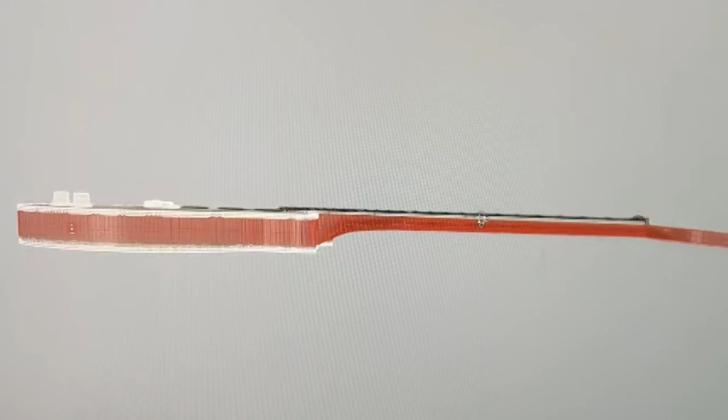Here's a little project I've been thinking about doing for a while: building, as near as I can without spending a crazy amount of money, a replica of the Red Special guitar, which was built by Brian May of Queen back when he was a young fella. So I'm hoping that I can produce something that can come close to his guitar design.

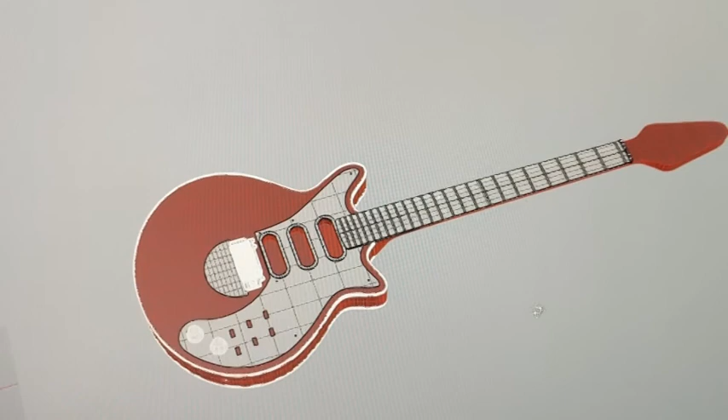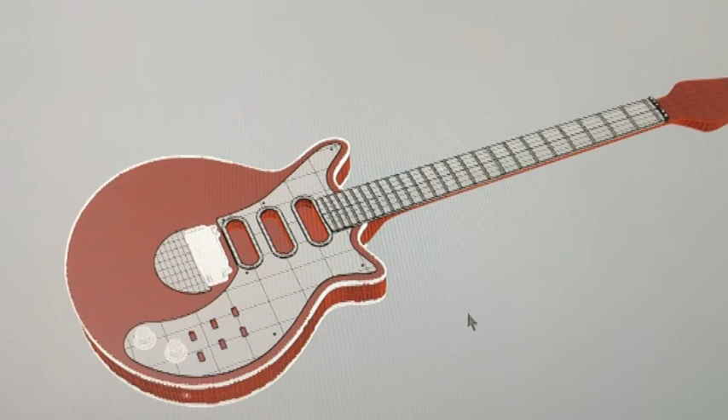I've been searching the net for a while, and I found quite a few people have plans for it. Obviously, to buy the proper plans you need to purchase them. I've just used pictures that people have uploaded to come up with the design, and then some of the specs from the Brian May guitar website for the radius of the neck. I know it's 610mm from the bridge to the nut, and the length of the guitar, plus a few other specs he's got on there. There was also a chap who did a restoration from Sydney of the original guitar, and he's put some fairly detailed specs and pictures of the internals of the guitar. So I'm trying to replicate that as much as possible.

Without spending a super amount of money. So looking at the guitar here, that's my drawing so far. So we'll just start to remove some things.

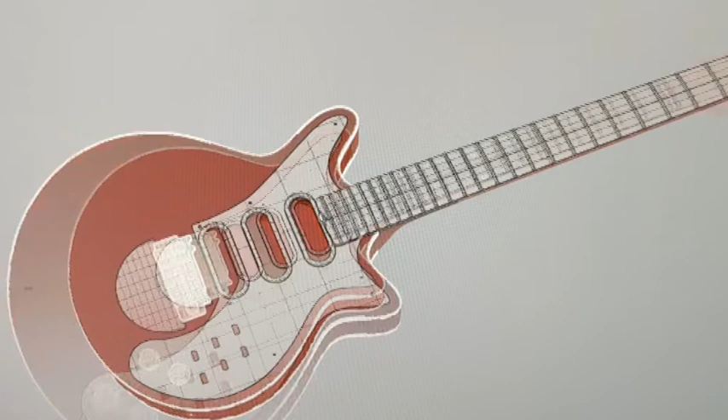So these, I've called these pickup outers. I think they're all made of plastic, but I'm going to probably mill them out of wood and just paint them all up nice and shiny. So we'll just switch them off. So that leaves that.

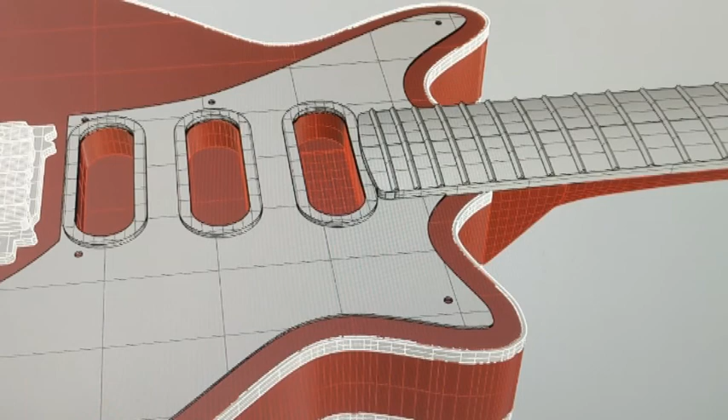And we've got the pick guard here. If I switch that off, it shows the knobs. I've purchased from eBay a couple of Fender chrome or silver knobs here. We'll just use those ones for the time being. You can purchase replicas of what was used on the Red Special, but again they're super expensive, so I'll just use some chrome ones. So we'll switch those ones off.

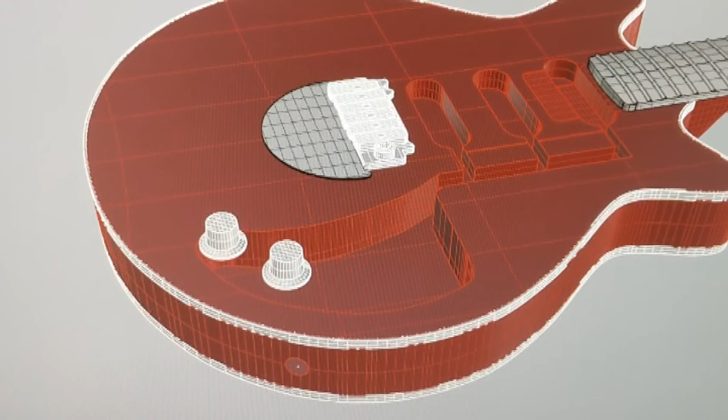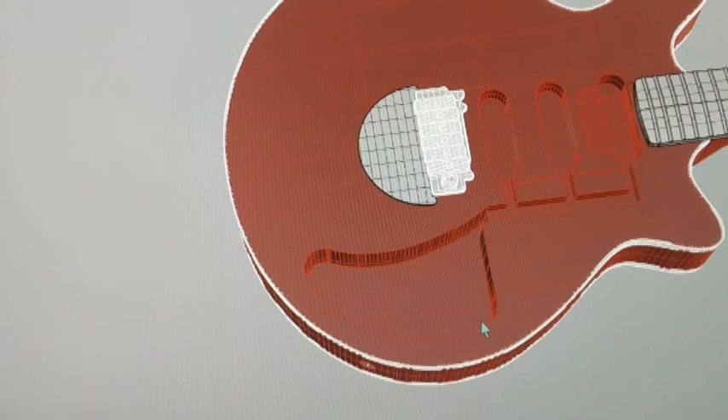The cavity in here, I've just sort of guesstimated at the minute. I know the original guitar had a cavity right along here, and all this was clear, and he had some posts here to do his wiring, so I may copy something like that, I'm not sure yet. If I take out extra wood here, it'll obviously reduce the weight of the body of the guitar, which may be worthwhile doing. But yeah, so I've just put a cavity in there for that.

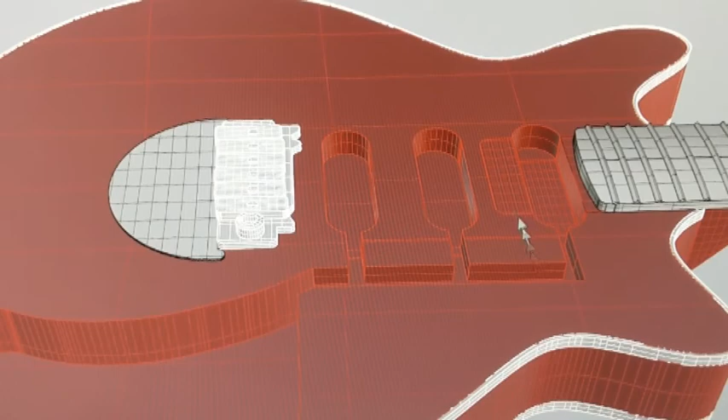Pickup holes are too deep, I know that, so we'll lift those up. The Trisonic pickups that are on the original guitar, I think you can buy them for about £200 or something or other. You can buy knockoffs from China, but I don't know what they're like, and they're probably not wired right, and probably got the wrong gauge wire, and probably got the wrong magnets. They look right, but they're probably all wrong, so I'm not sure.

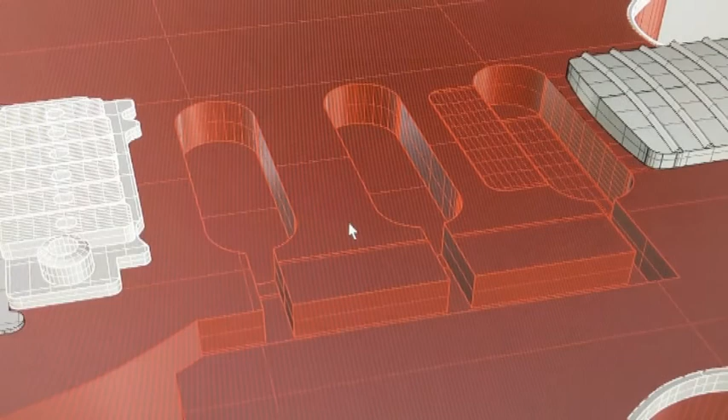You can buy parts from the UK for the magnets, for the original pickups. I've done a bit of research into winding pickups, but I've never done one. In fact, I haven't built a guitar in years. I built a good bass guitar about 35 years ago, I think. So this will be my second guitar. So what a better guitar to start with, huh?

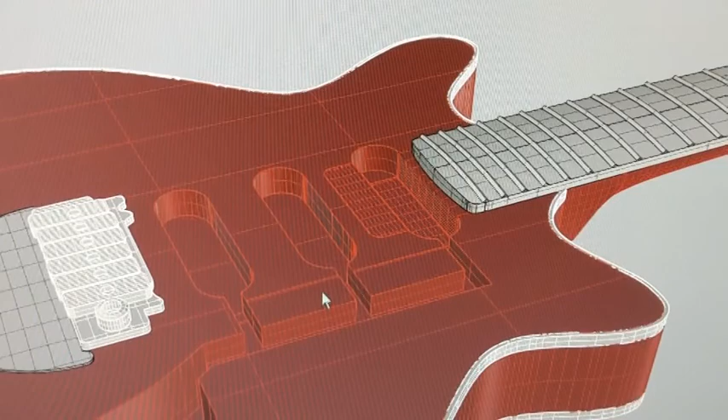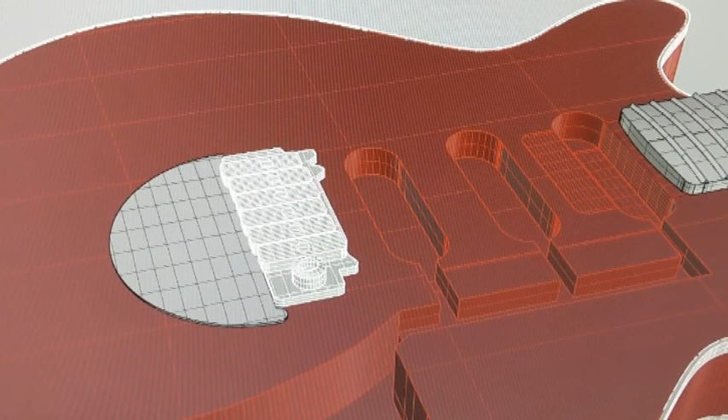Such a pretty looking guitar, this one. Now the bridge I'm using is a Wilkinson Bridge. As I said, you can't buy the one that's on the Red Special unless you're willing to spend a lot of money for a reproduction of what Brian May made all those years ago. So a Wilkinson Bridge. We'll just switch off this back plate here, the bridge backing plate I've called it, and obviously there's nothing there. If I switch off the Wilkinson Bridge...

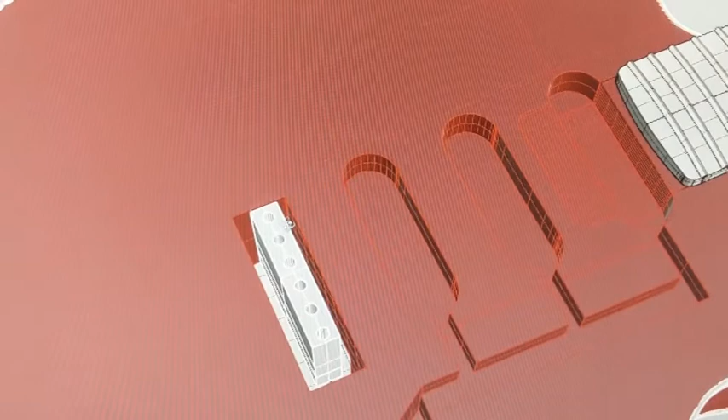This block is attached to the bottom of the Wilkinson Bridge. I've just guesstimated the holes there, they're probably a lot smaller than that, and I'm presuming there's a couple of bolts holding this block in place. Now, this entire block is 40mm deep. The entire Brian May guitar is 40mm deep.

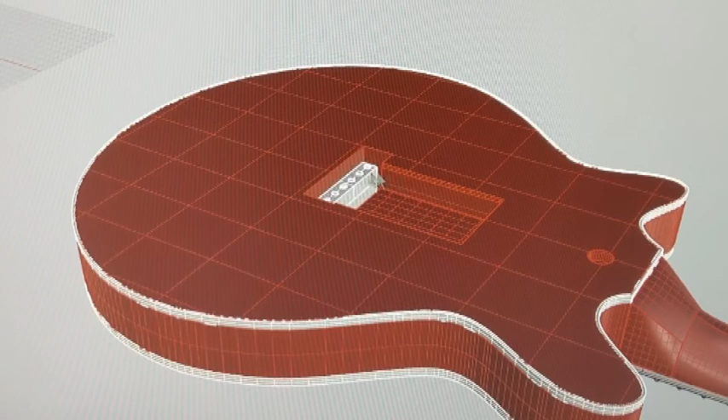So I've had to make this one about 43 just to provide that extra space at the bottom here for the back cover plate, I've called it, so there's enough room. Usually there's springs that run down here, 3 or 4 springs to keep the tension on this, which is attached to the Wilkinson Bridge, which of course keeps tension on the strings. And there's a whammy bar that comes out of here.

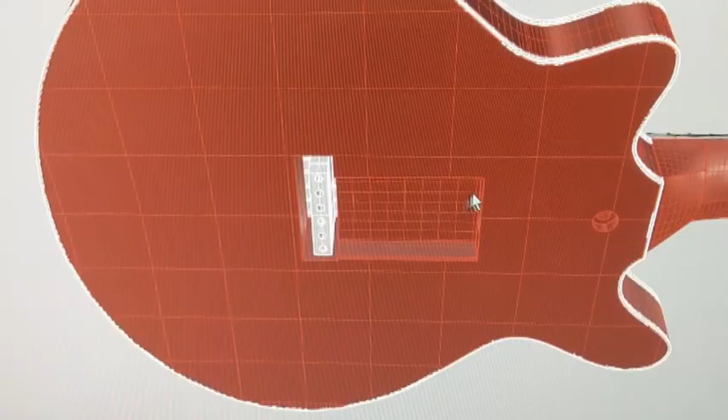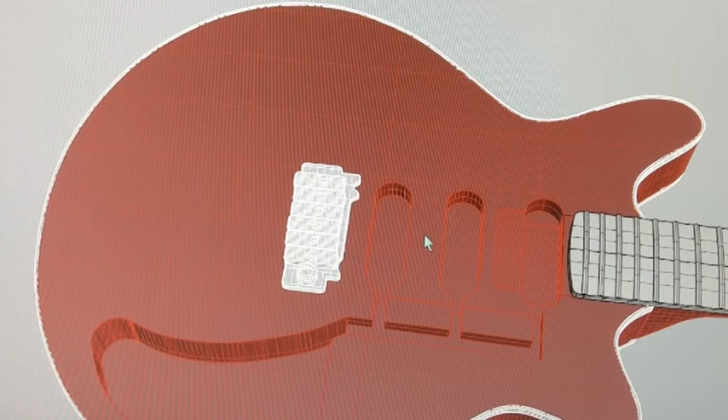Now if I go with that, I've got to have quite a large cavity under here for the springs, which means that I can't bring the neck down any further than this. So this is the neck—it slots into the guitar. On the Red Special, there's a bolt underneath the fretboard that comes out through here, and a nut holds it in place, with a couple of screws here. But if I do that, I've only got about 5mm of wood for those screws to screw into, which isn't sufficient, so I won't do that.

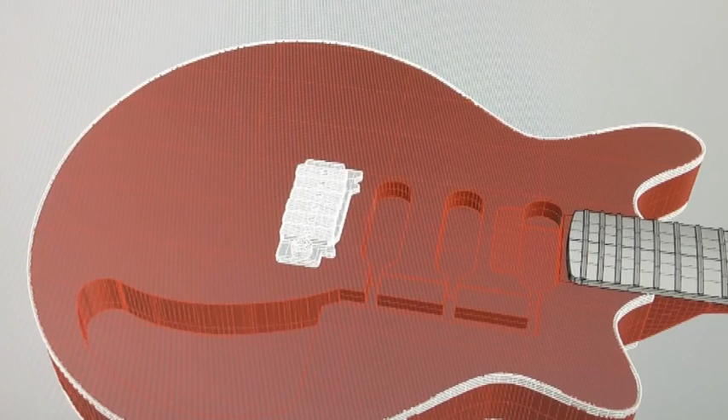So we'll just switch off the binding, which I'm going to put on it. That way I should be able to mill all this nice and easily, then glue on the binding. We'll switch off the bridge—bridge is off—and switch off the block. So it's a hole straight through there.

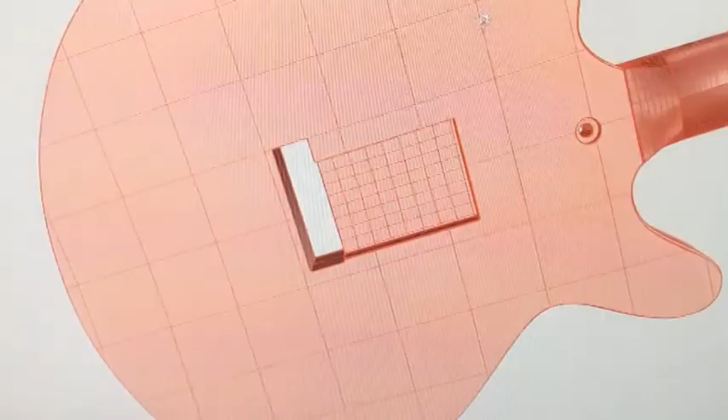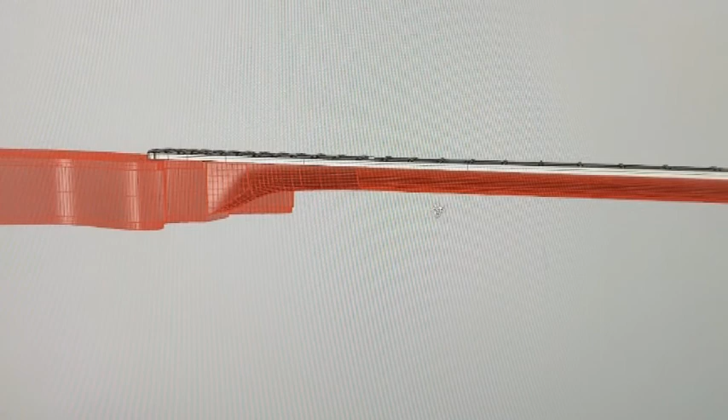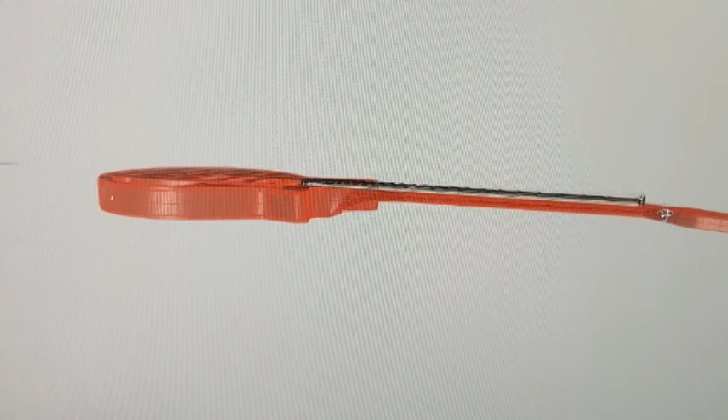If we look at the neck of the guitar, Brian May's neck is pretty thick. I'm not sure if I want to go that thick—I've made a thinner neck here. I might go true to the design and redraw it. I've got a 4-degree angle on the head, and a 9.5, or maybe 9.4, radius all the way along the board.

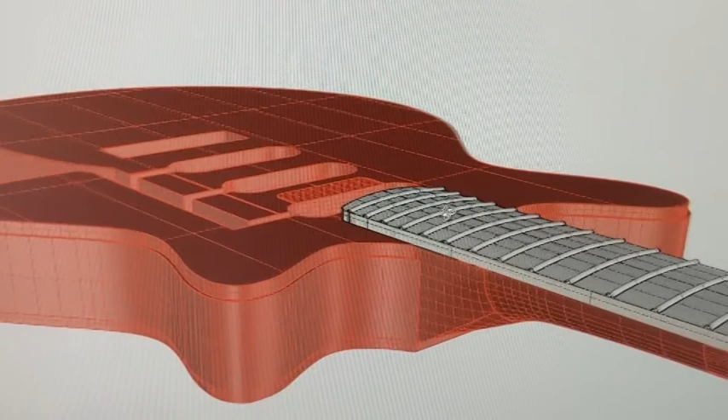So I'll mill my own fretboard and put my own frets in. I've looked at a few videos of that, and I should be able to do it okay. I've got a plasma cutter, so I might make a couple of tools to press these in place using my drill press with a correct piece of metal over them, with a groove ground in it. I can make a press, I'm fairly certain of that. I'll switch off the fretboard and the nut.

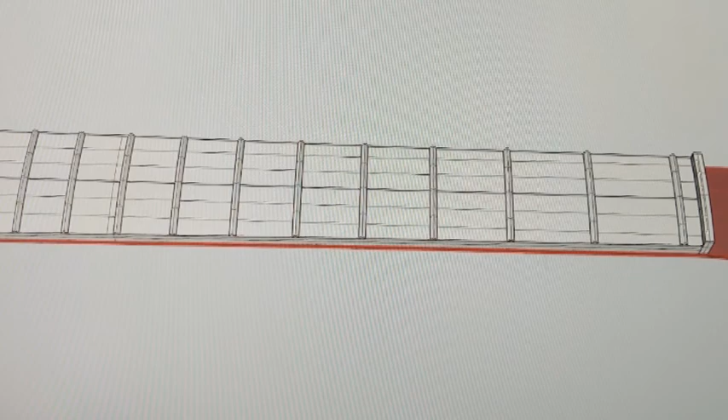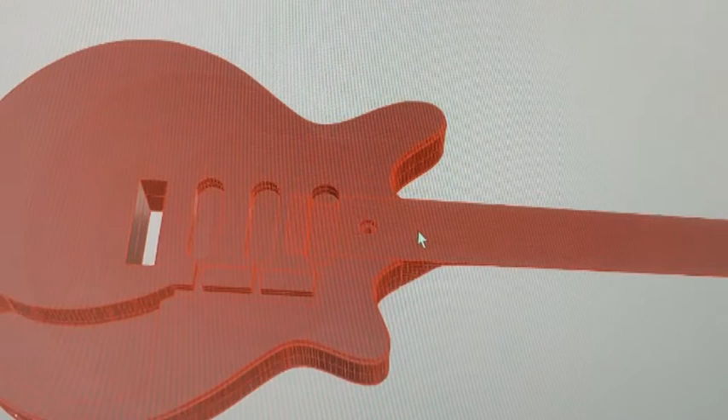Frets on the fretboard—they're gone. I'll switch off the fretboard and the nut, so that's what it'll look like without the fretboard on it. I've ordered a 440mm long truss rod to fit down in here. I'll switch off the body of the guitar now—so that's what that looks like so far.

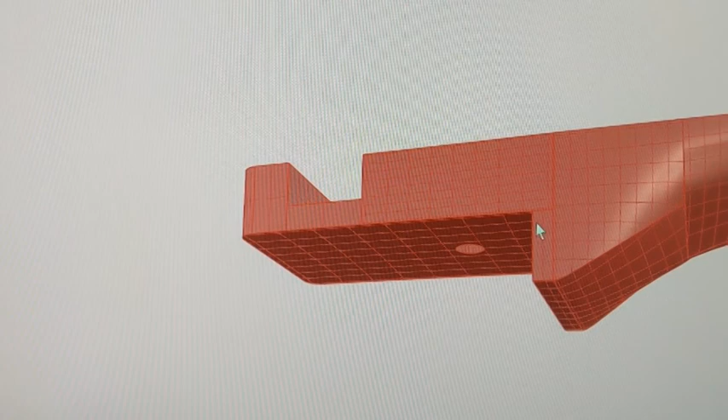There'll be a bolt sticking out here, which will be permanently stuck in place with the fretboard on top of it. This part slots inside the body of the guitar. If I switch it on, you can see it slots inside it—it's the same as what is on the Red Special.

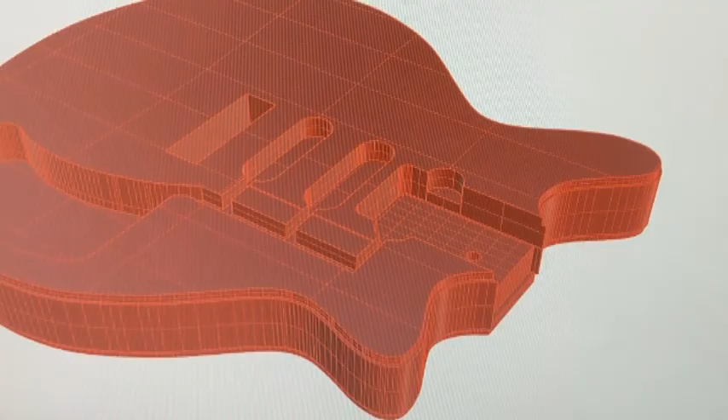So if I turn off the neck, I can show you the slot there. I've been thinking of a way to carry this on down to here. I don't know if it's going to work, but I figure I'll make one of these out of plywood, just as a sample first, and see what I can do.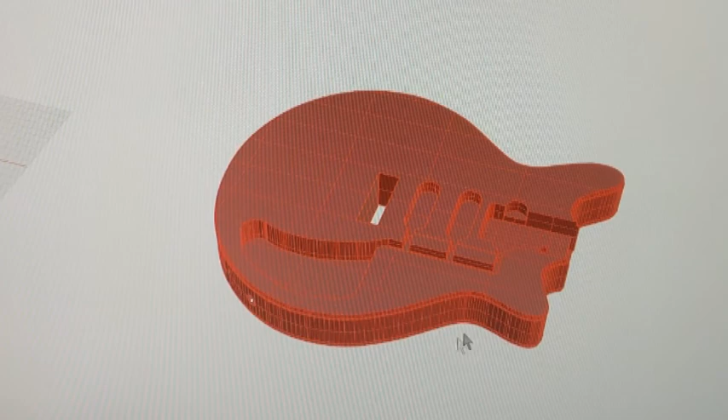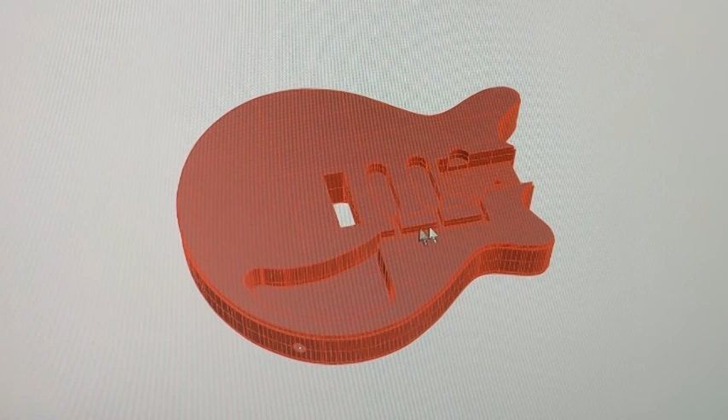My plan is the Wilkinson Bridge sits here, and I think it's got 3 or 4 bolts—I don't know yet. I've ordered one online, it hasn't arrived. It's holding the block in place, so the block attaches to the bottom of it, I hope. So that's the Wilkinson block.

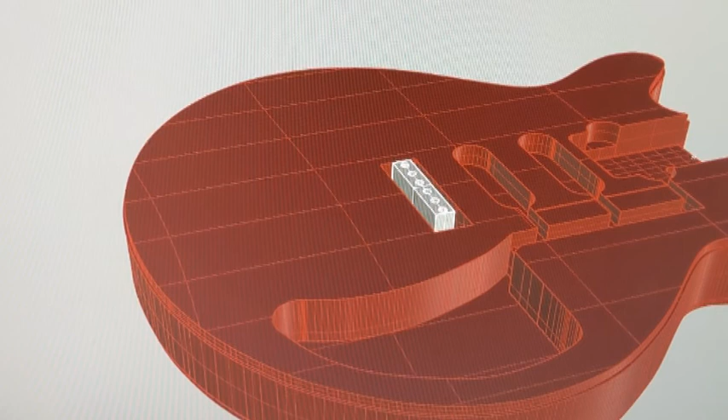Now what I'm thinking of doing is making my own block, drilling the holes again through here, and putting some holes through here, so it would look more like that. I'll get rid of the body so you can see it—so it would have holes through it there.

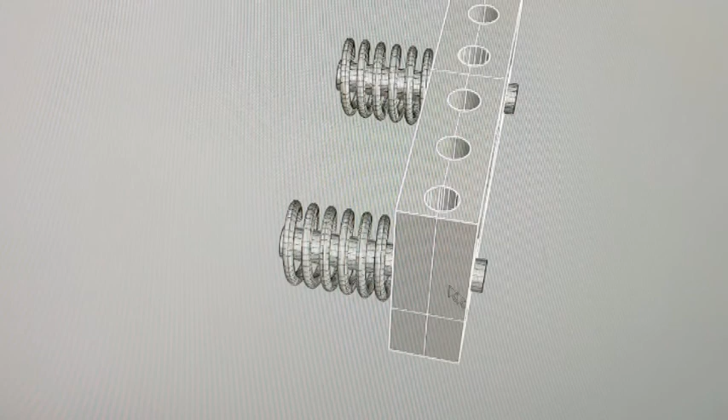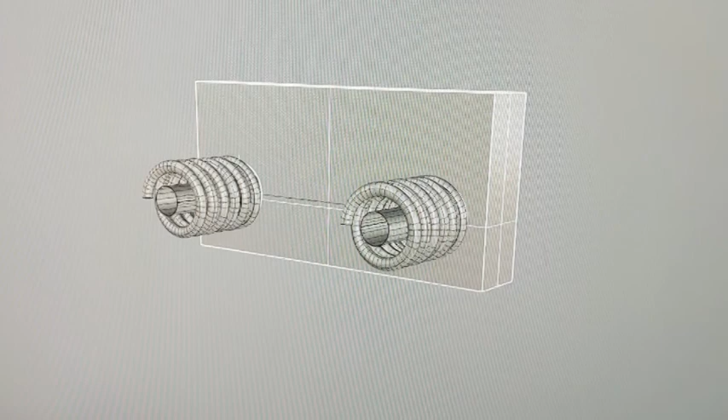That's sort of what Brian May's done on his, and he also has some springs and bolts. So I'd have to attach these bolts to a bit of metal, which I could then screw onto the body of the guitar and put some nuts here. In effect I'm changing the length of the original block—it's that long—and then I could reduce the depth of the guitar to 40 millimeters as it's supposed to be, and still have it functional.

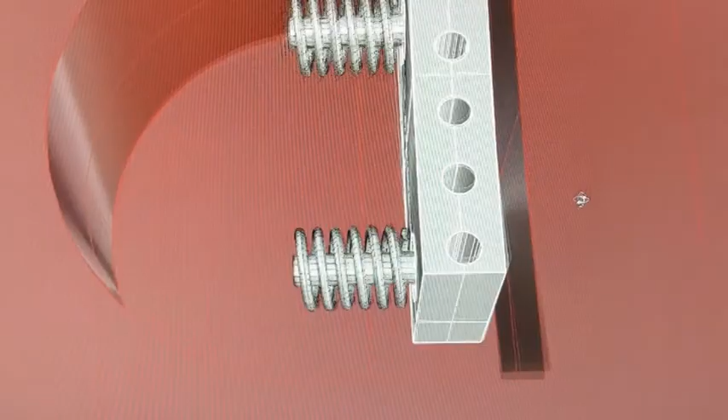So I'm copying Brian May's design here, putting springs on it, and what I'd end up with is a body with a cavity here and no cavity at the bottom. How the strings go in, I'm not exactly sure yet. I may be able to drill some sort of entry on this side with holes to go up, and just push the strings through here. Otherwise I'd have to undo these bolts and take out the whole thing, or alternatively put some holes through the bottom—but I really don't want to do that.

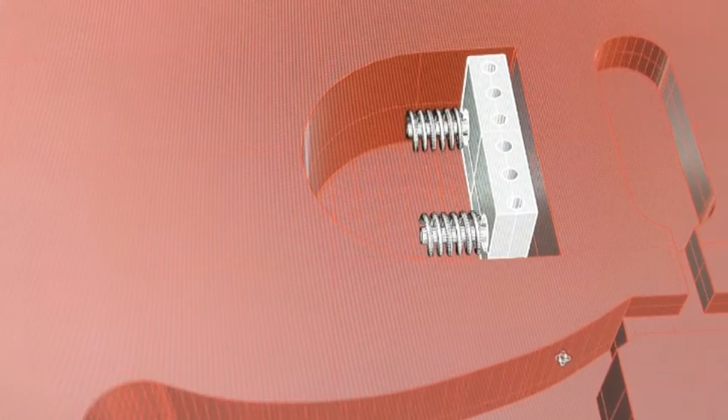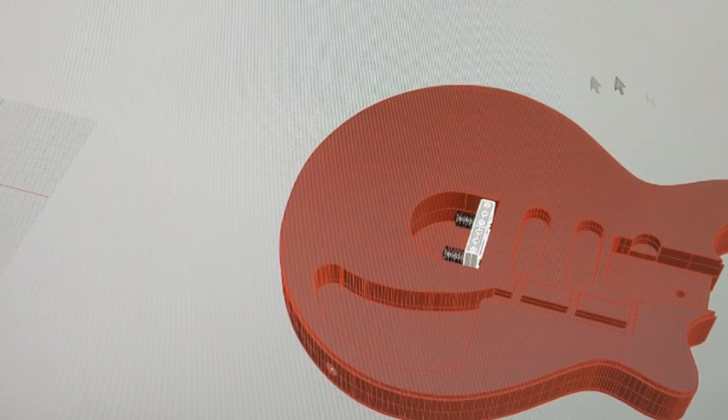So that's the plan. What that does is get rid of the cavity here, so I could bring this neck right back to here, which is where it goes on the original Red Special, and then have the bolts here biting into timber as I screw it in. I'm just going to make it out of a solid piece of wood—I'm not going to do layers as was done on the original guitar. So that's sort of the plan. I don't know if it's going to work.

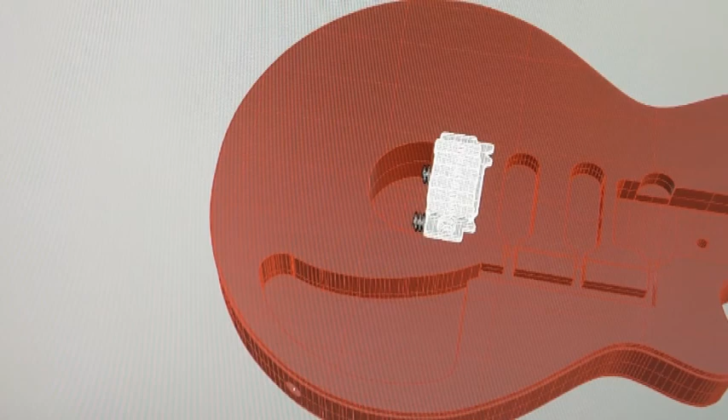So I'd bolt that on top, put the bolts down here. I think there's room there to do all that. And then the back plate would be covering that hole there, which is exactly what's on the Red Special. The guitar would have just the one hole there with the bolts. The neck would come right down to here, as I said.

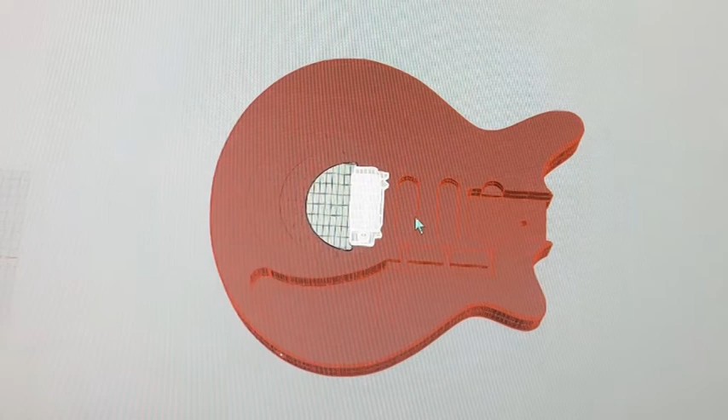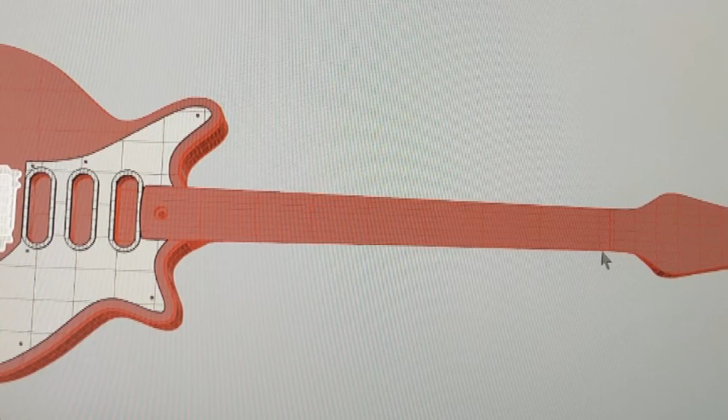Yeah, so that's my plan. I don't know if I can actually pull it off, but I'm going to give it a go. I may make the neck bigger yet, because my neck is quite thin here. It's the same as the Fender, as that's sort of what I've been messing around with, just a replica Fender.

I've only got cheap crappy guitars here, and I can't play a guitar very well. I'm learning, so this is fun. I figure if I own my own guitar that I made, I'll maybe put more effort into it.

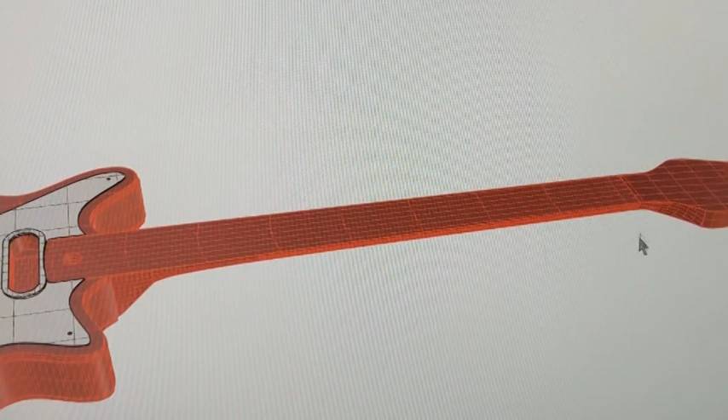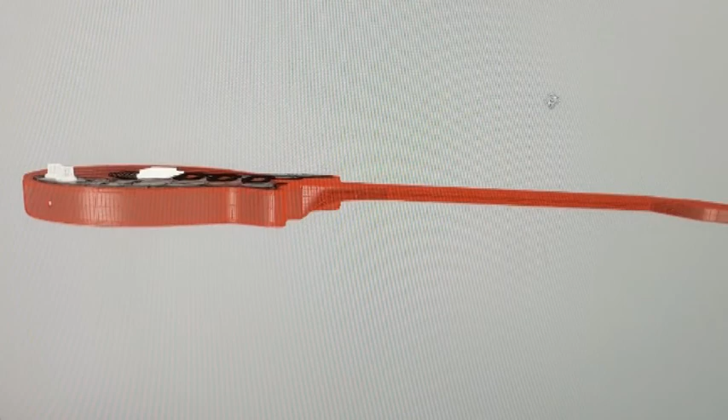So yeah, on the Red Special, it's thicker here. I think this is 21mm from the top of the fretboard to the bottom of the neck here, and I think Brian May's is much thicker than that. I may thicken it up just to make it more authentic. It really doesn't bother me any, because I'm not used to any guitar, so I might as well get used to playing on my own guitar once it's built.

So there you go. If anyone's got any feedback as to Tri-Sonic pickups, where I could get some of them, I guess that'd be nice.

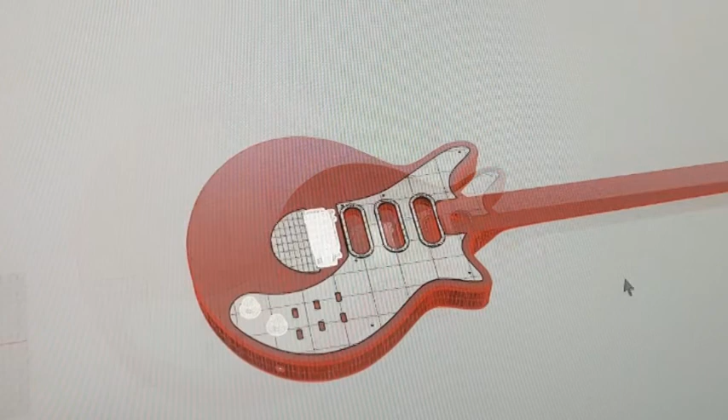Interestingly, I've been reading the restoration, and the chap that did it talks about the magnetism of the magnets. He says the first one is north, so the north one faces up. The next one he gives us the south Gauss reading, the magnetism, and the next one is a north reading, but there's an arrow facing down.

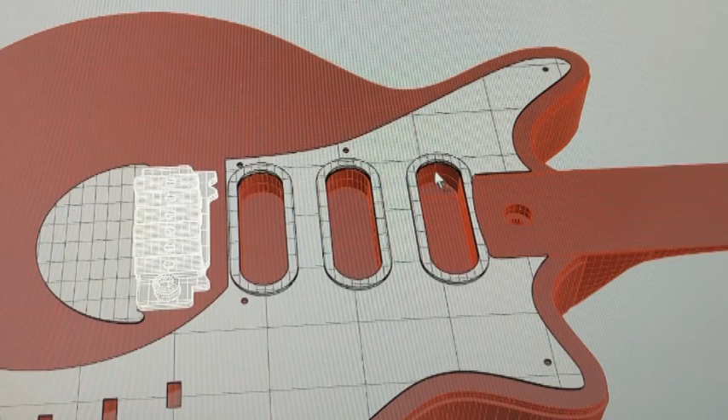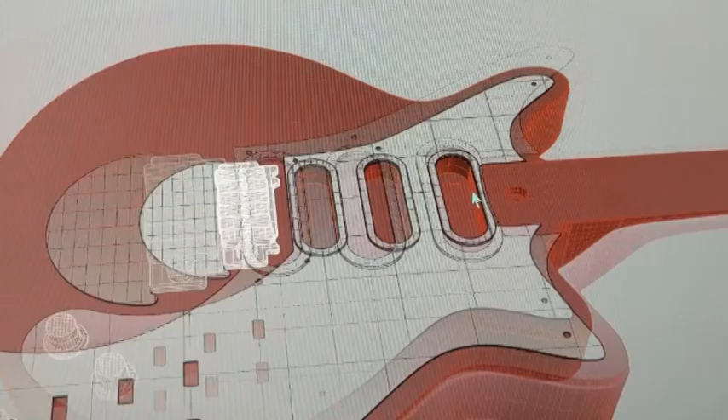So that leads me to believe, I don't know if it's true or not, that he's got two south facing poles here. From what I understand, Brian took the case off this coil and magnet so it would behave differently, which is what everyone talks about with the Brian May guitar sound effect. But I've always thought this would have been north, north, south. There's an arrow pointing down on the north, and I'm thinking, does this pickup go down? If anyone has any information on that, that'd be nice to know, because I just put it down, and like I said, I haven't got any pickups yet.

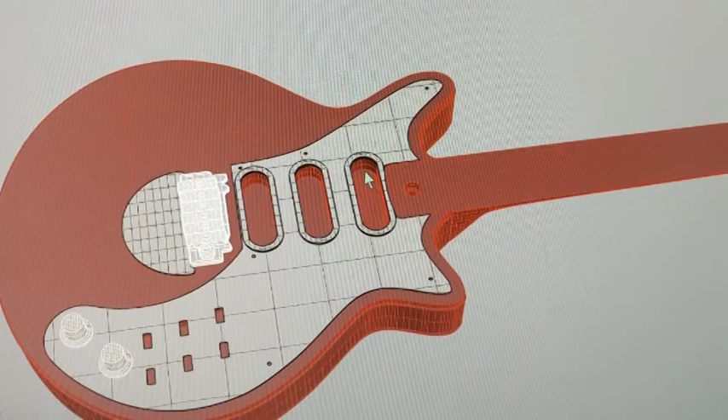I'm toying with the idea of buying the parts and making them, even though I've never made a pickup, and never made a Red Special before. It's been a long time since I've had a go, but I'm fairly skilled on the CNC machines. I've made replicas of other bits and pieces, Batman's motorbike and costumes for various things, so I don't mind having a go at these things.

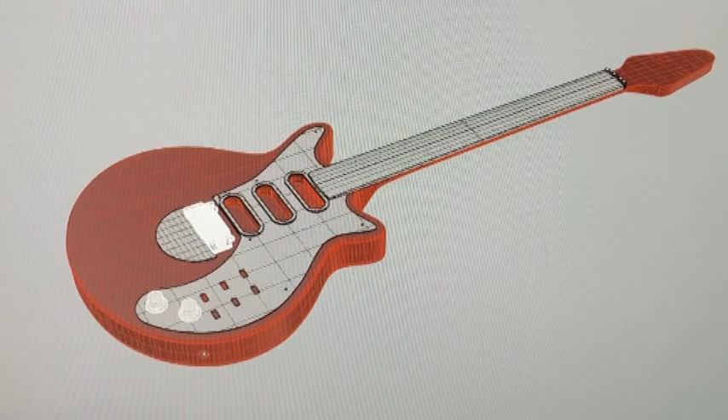So there's my current project. Let's put the fretboard back on it. Let's put the frets back on it, frets on the board. I think that's everything that I've done to date on the drawing.

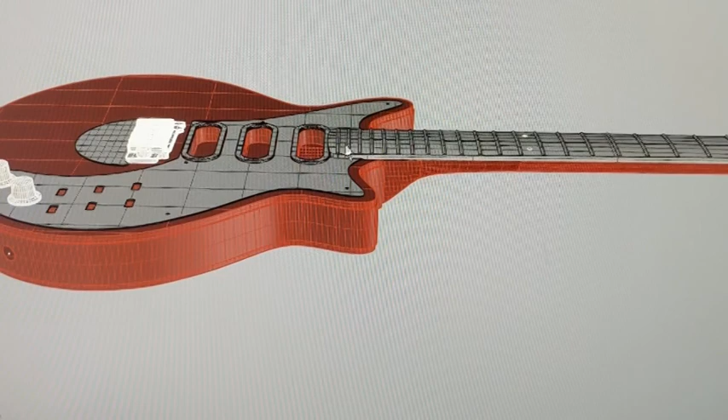So yeah, still a few things I need to sort out. Once the bridge arrives, as to whether or not I need to put an angle here on the neck. I'm not sure. I think on the Brian May guitar he had one, but he may have had a different size bridge. I'm not sure whether or not I can keep this flat straight along here. I'm uncertain yet.

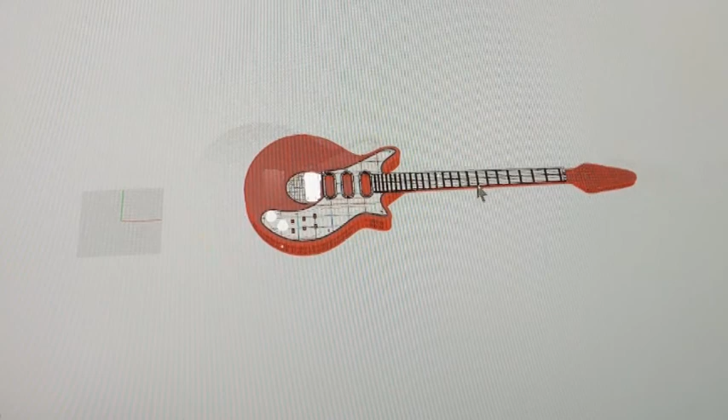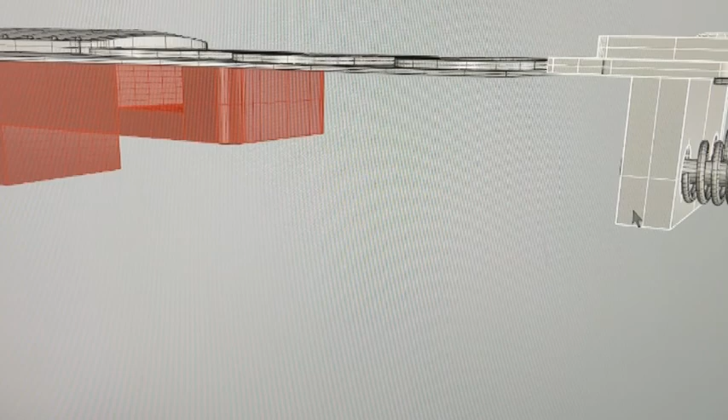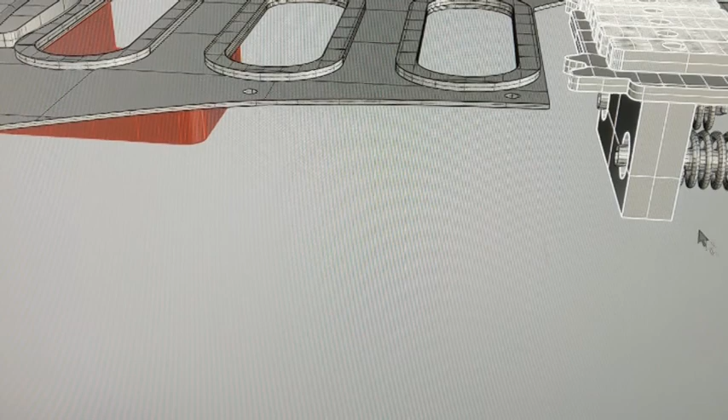Anyway, there's my plans so far. Once I've got a bit of plywood, I might mill this body shape, and once the bridge arrives, hopefully it'll have a few bolts and I can take it apart, remove the original block, make my own block here, put some holes in it like this, a metal plate to hold this. I'll probably just have an L-shaped bracket with holes drilled in it, or I'll weld these on, I'm not sure yet, and have nuts on the end to adjust the tension on the springs. Uncertain yet. That'll just be bolted to the bottom of the guitar there, to the guitar body.

But yeah, anyway, hobbies are fun.